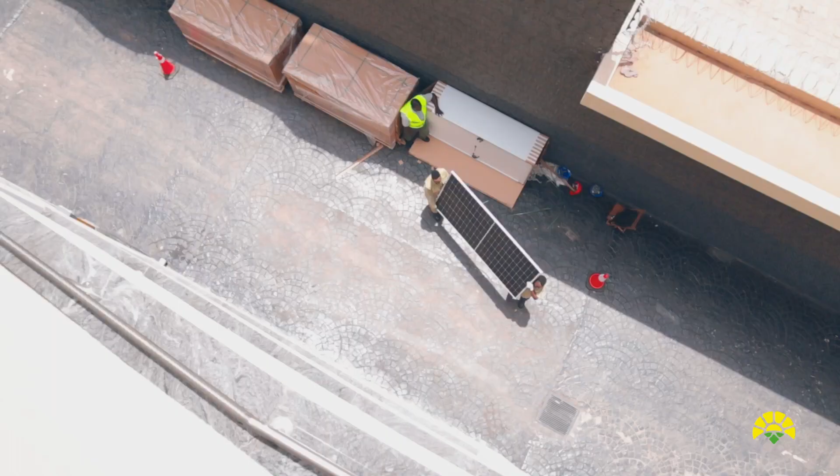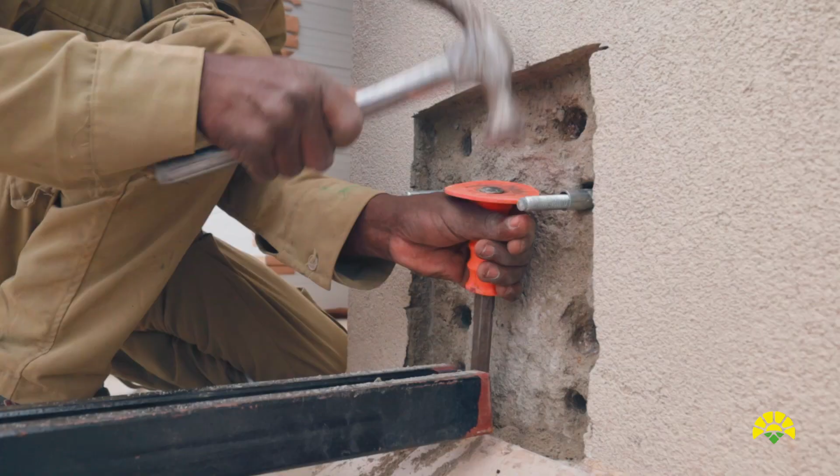In this video, you're going to see a lot of people doing a lot of things, cabling being one of them. We have to make our work look very clean. The weight of the cable is very heavy, 35mm cable. It needs a lot of teamwork.

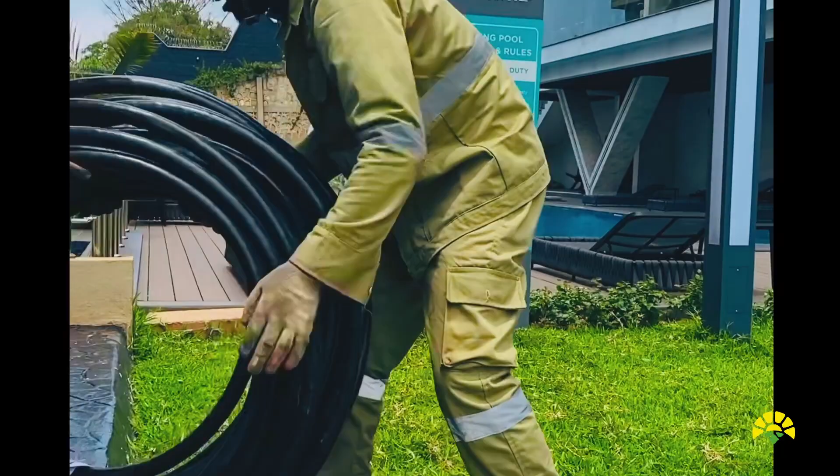Basically, we provide solutions for the commercial and industry market. With this, we're able to reduce, depending on the need of the client, energy bills and improve stability of power. We're able to provide all this.

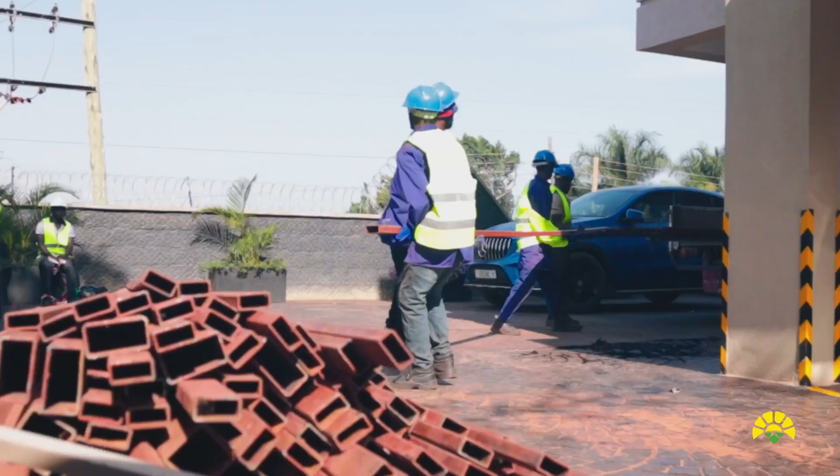This place here, the panels are supposed to go like this. These are vertical supports, 60 by 60. These are purlins, 80 by 40. We have 4 of these roofs we're covering in panels to really reduce the cost of their energy bills.

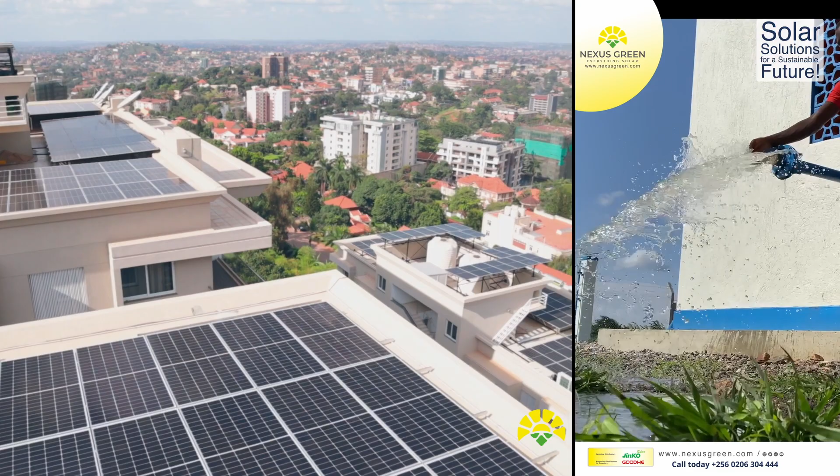We use tier 1 products, they're the best, and we want to give you the competitive pricing. So we are now the exclusive distributors for Jinko, which thank you Jinko for giving us that opportunity. This is going to be a game changer.

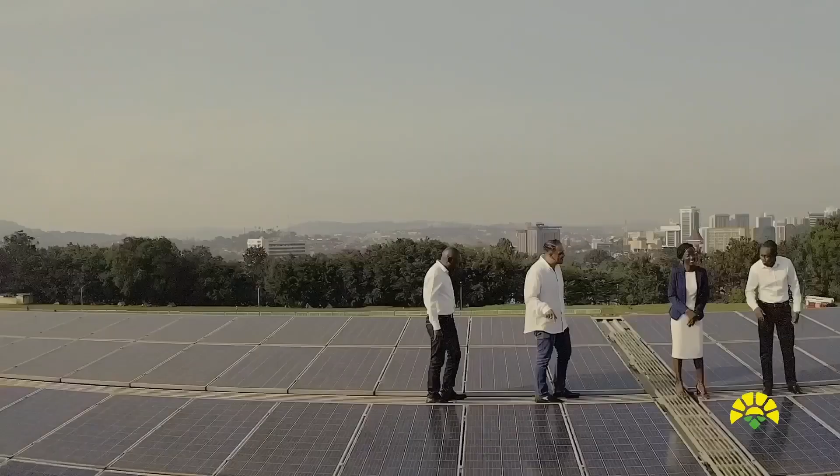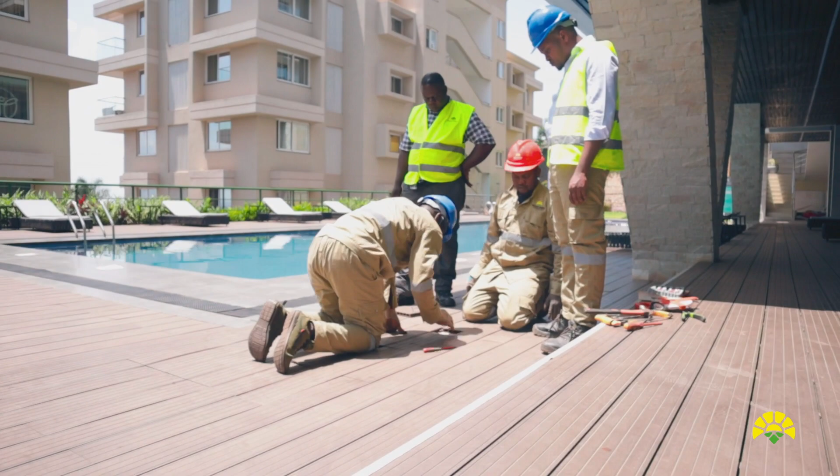Hello everyone, welcome to the Summit View Residence. Today, on the first day as Nexus Green, we are here to lay cables from one point of the inverter. We are using Fronius inverters. We shall have 2 inverters on this swimming pool, one at the other point, then the other at the other point of the building.

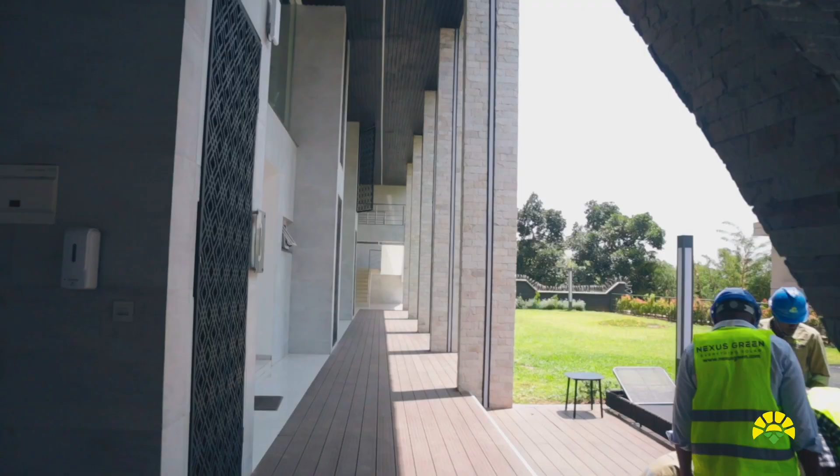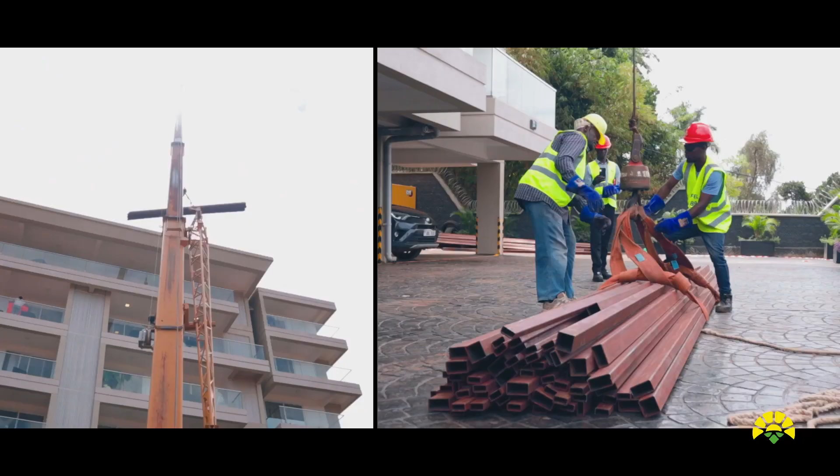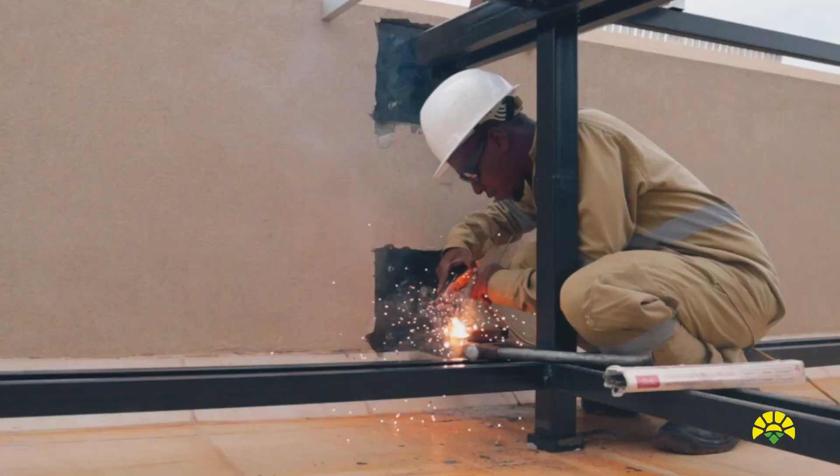We started by hoisting materials to site using a crane. The support structure has a simple dynamic - it attaches, holds anchors from wall to wall. We don't attach it to the floor. So we have 60 by 60 by 3mm hollow pipe as vertical members welded onto 50 by 25 by 3mm running beams. We also have rafters of 80 by 40 by 3mm where the panel sits.

After that, we anchor all the horizontal beams and the rafters onto the wall.

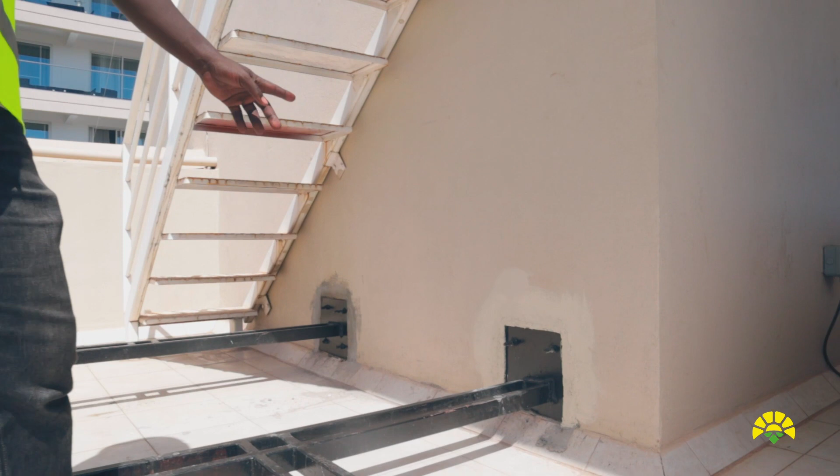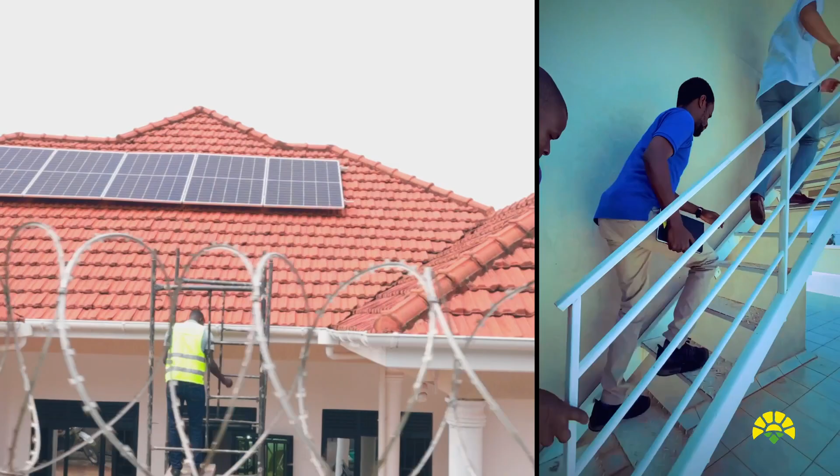Nexus Green is an EPCF company - engineering, procurement, construction, and finance. Basically, we provide solutions for the commercial and industry market. With this, we're able to reduce, depending on the need of the client, energy bills and improve stability of power. We're able to provide all this.

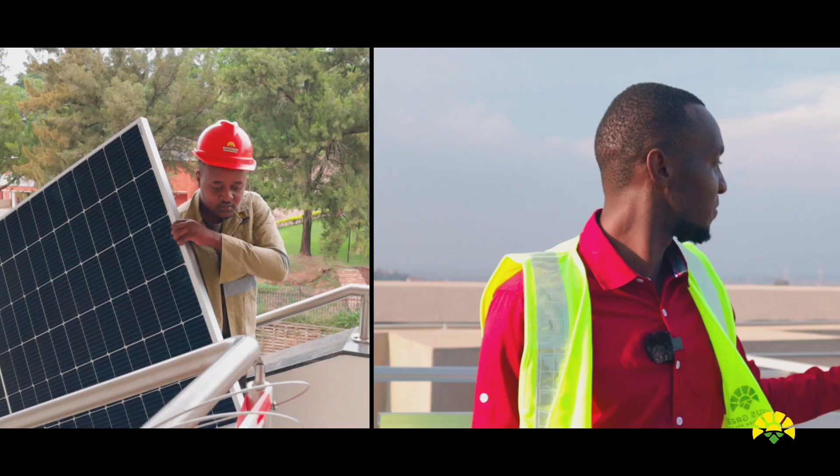At the moment, as you can see, we are trying to start on the panel layout. We've already done the base structure, and then on top of it, we shall have the solar mounting structure.

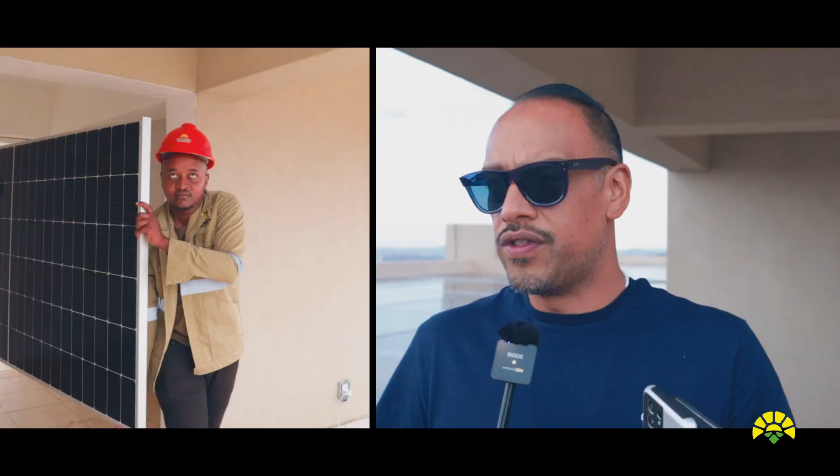What you're seeing today is one of our first residential solar solutions for this beautiful building called Summit Residence. We have basically covered every single roof with solar panels, so it will reduce all their bills during the day and on the shoulder, which we found out is 67% of their energy consumption. So this is going to be a great saver for the owners of this building.

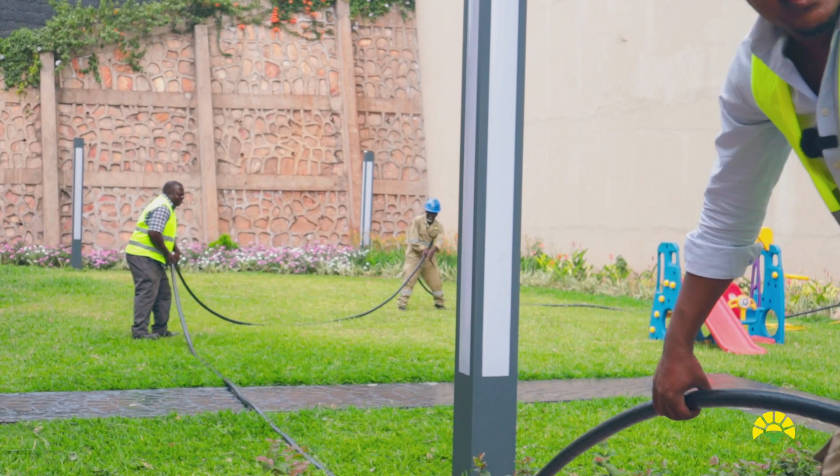We have to make our work look very clean. The weight of the cable is very heavy, 35mm cable. It needs a lot of teamwork - as you can see, it's a team of some heavy gentlemen.

Most people know Nexus Green for the Ministry of Water project we have, where we're blanketing the country with about 680 irrigation and water supply sites. As a company, we have a plethora of activities that we do. One of them is commercial and industry, where we provide solar energy use, productive use basically, for different environments. This job isn't a one-day thing.

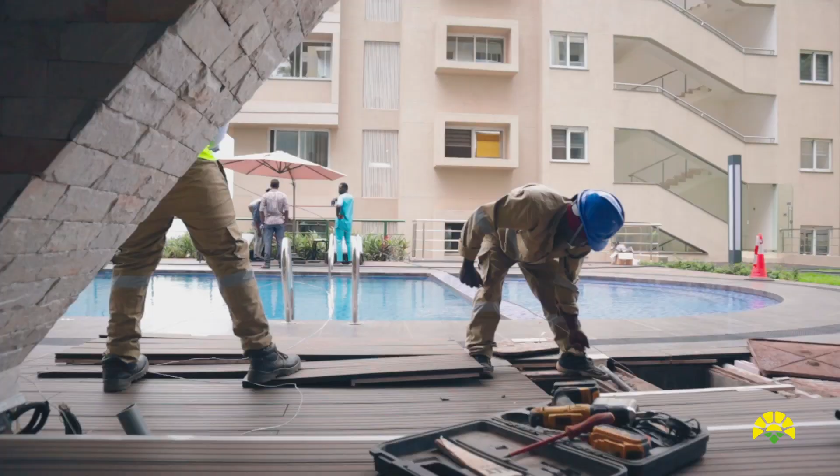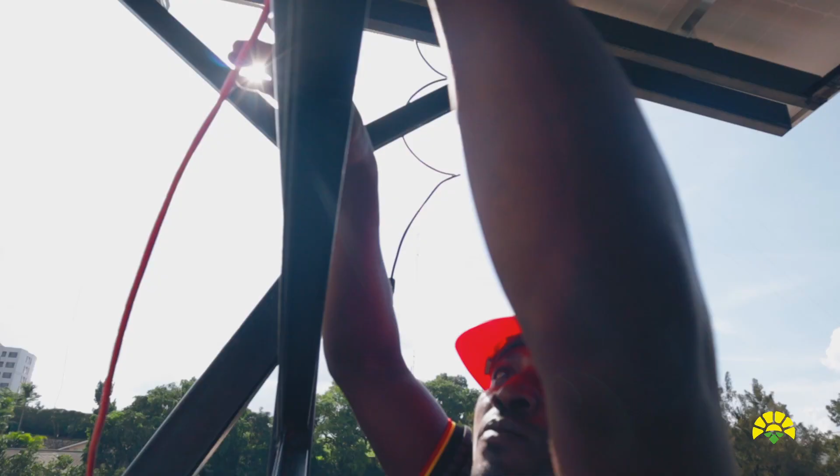It needs a lot of effort, needs a lot of energy. After we did an energy analysis of the site, we put in fluke machines to understand the energy usage, and come up with a detailed analysis of how power is consumed there. You realize most of their power is consumed during daytime. So with this, we're basically offloading most of that energy use at daytime and giving it to solar.

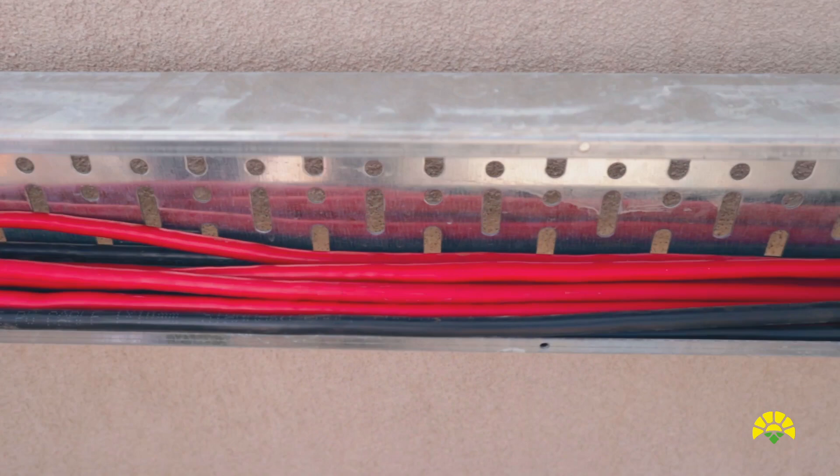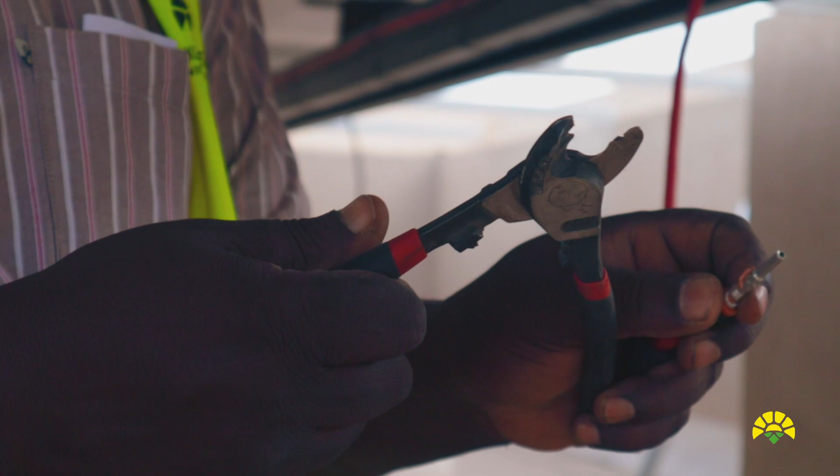We are at the equator, the best place to have solar, which is Uganda. So if you can offload that day load using solar, you've reduced their energy bills or energy consumption in a month by more than 36%. So with that, someone has more capital to invest in other things and allow solar. Remember, with solar, you're looking at a lifetime of more than 20 years of the panels. So for the next 20 years plus, they're enjoying amazing benefits from the solar.

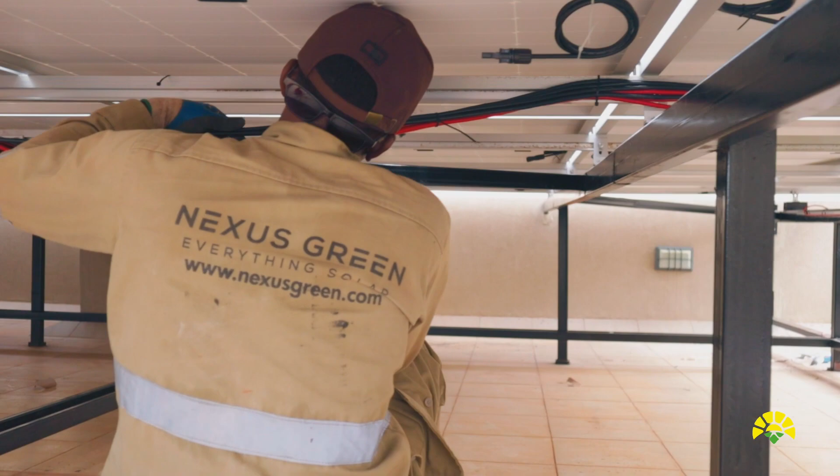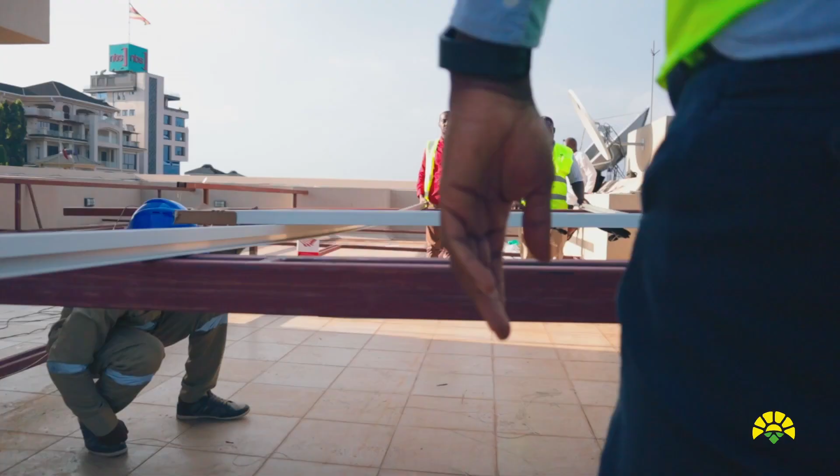Pull this rail lower, where it will clip on the panel, right? What do you want to do over here? All right, then get your book. You check, is it okay? Now put another one, put another panel. Now, do you want to add the third panel because we have it, or you think you can?

We add it, bring it. We had started by doing a structural analysis on this entire floor just to make sure that everything we are adding will pass a structural integrity test.

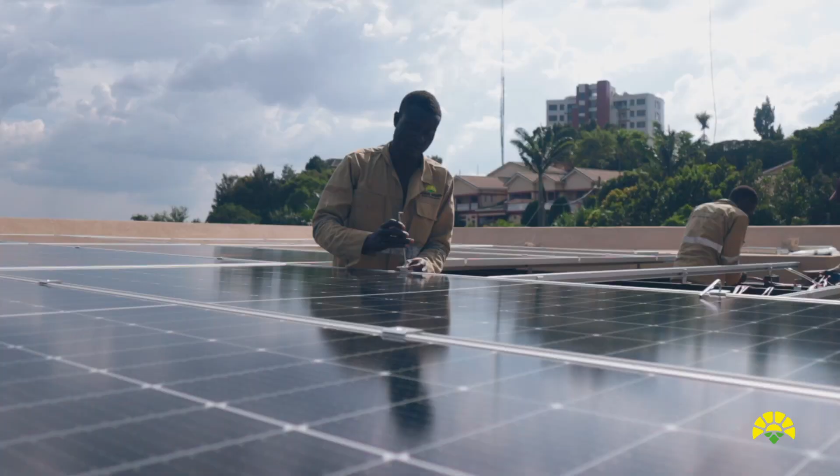We are guiding the team on how to correctly lay and screw the panels to make sure they are not blown off by the wind. So it's a very interesting phase. This is where we ensure that everything is done as per the book.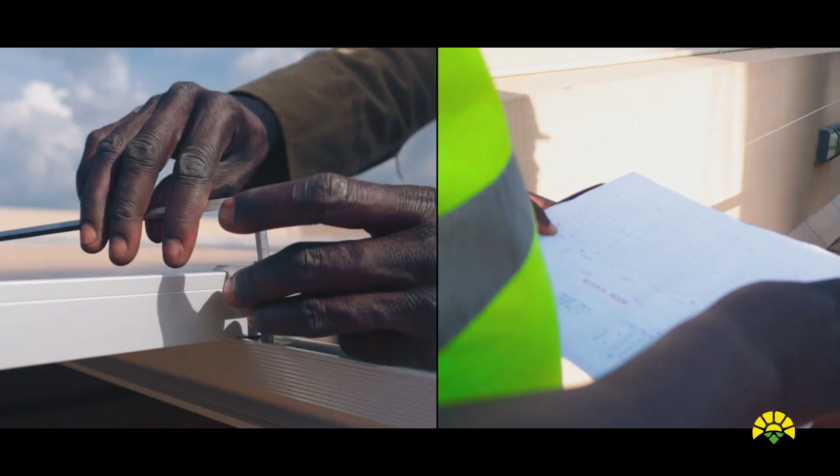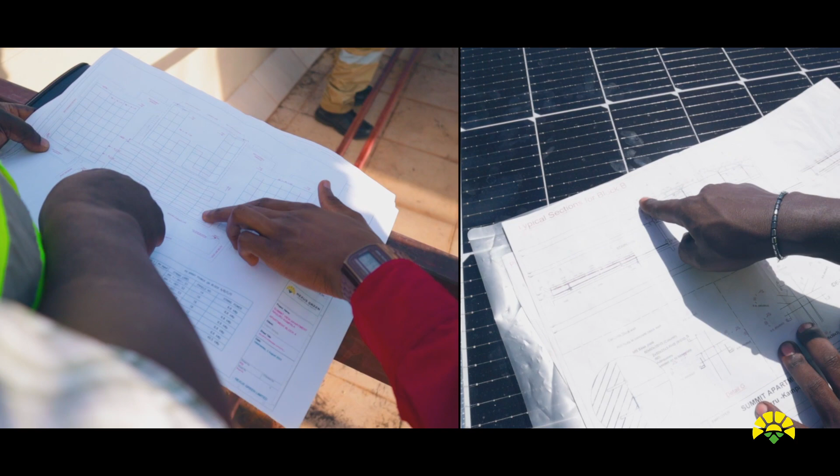This place here, the panels are supposed to go like this. This is the one. These are vertical supports, 60 by 60. These are purlins, 80 by 40. And these are cross beams of 50 by 25.

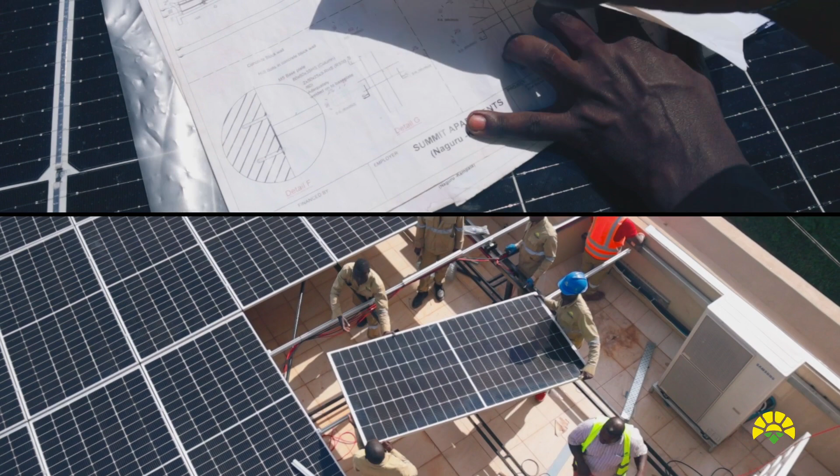So this detail F here is how to anchor the plate onto the walls to make sure our structure is very strong, has no wind uplift force that can work against it.

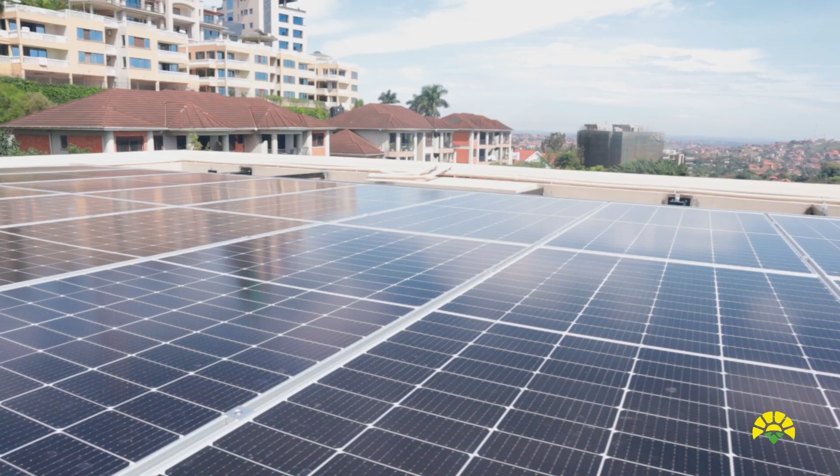These panels are Jinko panels, tier 1, phenomenal panels. They have a warranty for 25 years and above. These are 550 watt peak panels.

As you can see, the guys are still working hard. We're going to get this finished by tomorrow, and then we commission, so really excited. If you look up there, we've also got panels there.

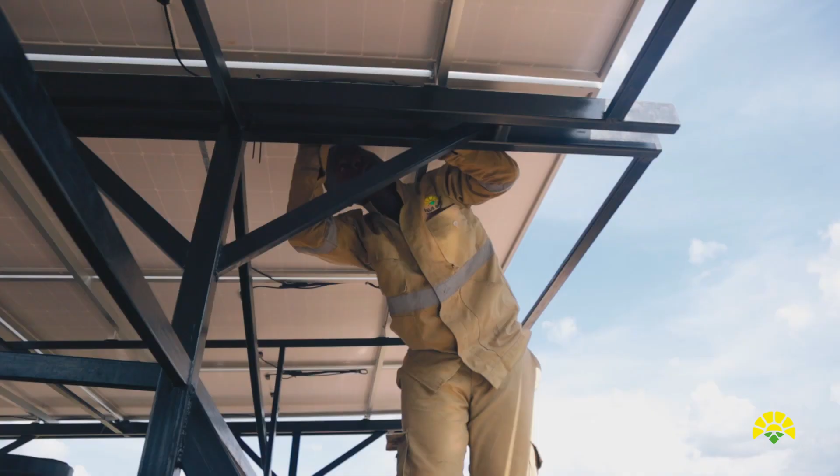This one here is a bit tricky because we are trying to protect the utilities, the water facilities, without changing the design.

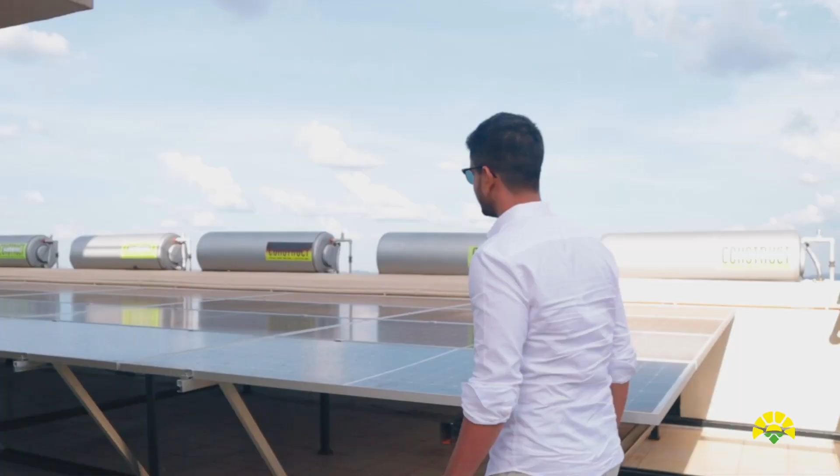Yes, it's been a very good experience working with Nexus Green. You know, the levels of professionalism and trying as hard as possible to keep to deadlines. As you can see, we are quite happy with how neat the final solution has come out.

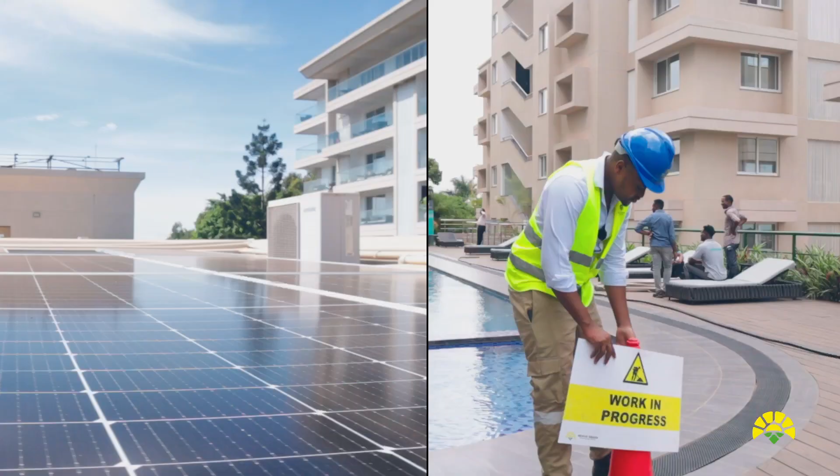As Nexus Green, we ensure that everyone is safe, having a helmet, a reflector, and a very nice trouser, well labeled Nexus Green with the safety shoes.

We've done 4 of these buildings exactly like this, covering the whole bottom part and the top part with solar, and essentially this is now going to be used during the day.

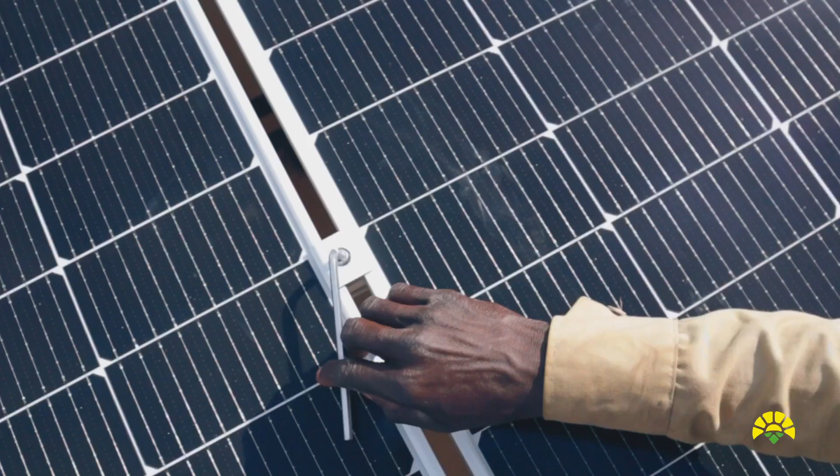This is one of our trophies here in Uganda. It's a game changer, and if we do this for this residence, we can do it for all these other apartment blocks that are coming up. Can you see those apartment blocks?

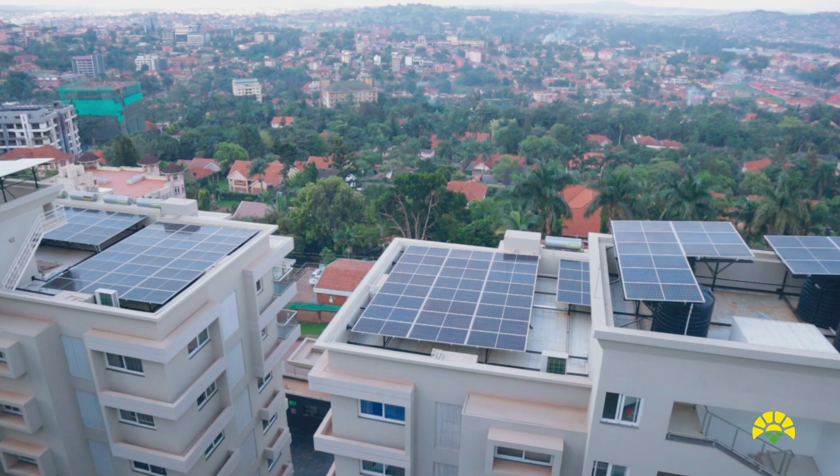We've got different buildings in the pipeline at the moment, ranging from commercial to residential, and also certain projects within the tourism sector. So yes, definitely Nexus Green can and hopefully will play a role in these buildings and projects, especially in terms of creating a fully sustainable property.

It's a selling point, especially within the ecotourism sector. We do see a potential future for growth.

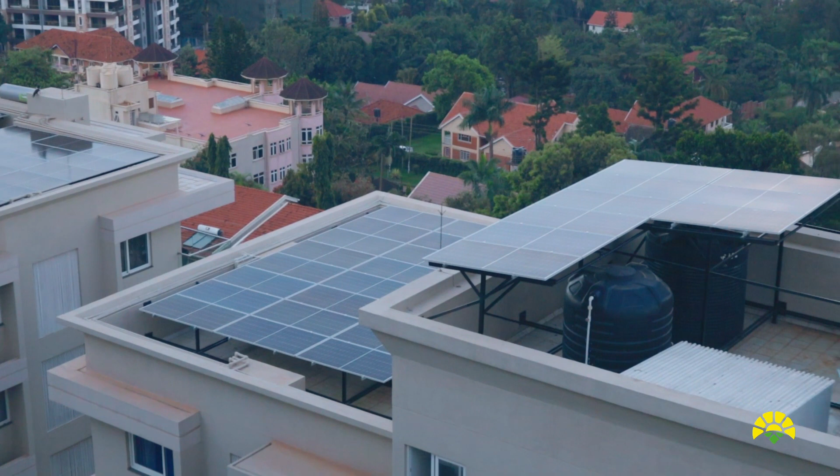When we look at our current Umeme bill, we do see that majority of our consumption is on the shoulder, which is the daytime consumption. So we're looking at anywhere between 50 to 70% savings on our month-on-month electricity bill, which is significant, and hopefully it will result in a payback anywhere between 5 to 6 years. So that's quite exciting, and after that it's pure profit in our account.

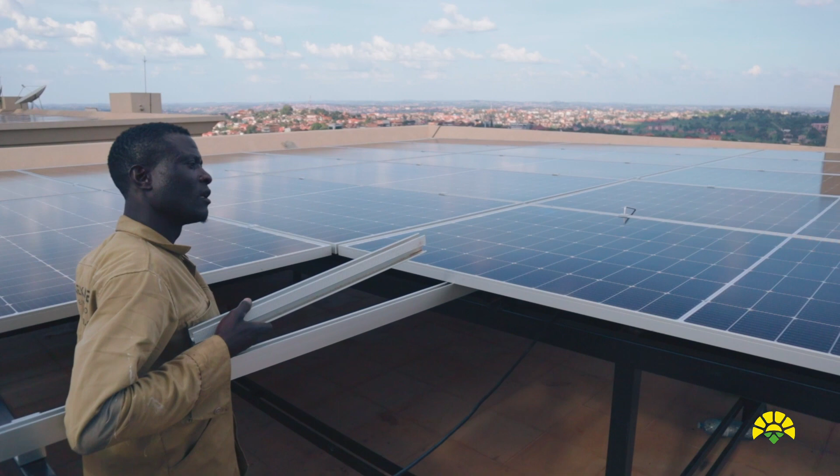So we're excited. So it's about making sure that you make the savings and get your responsibility as a company or this residential owner here to make sure that he's doing his part to reduce his CO2 footprint. So that's what we're about.

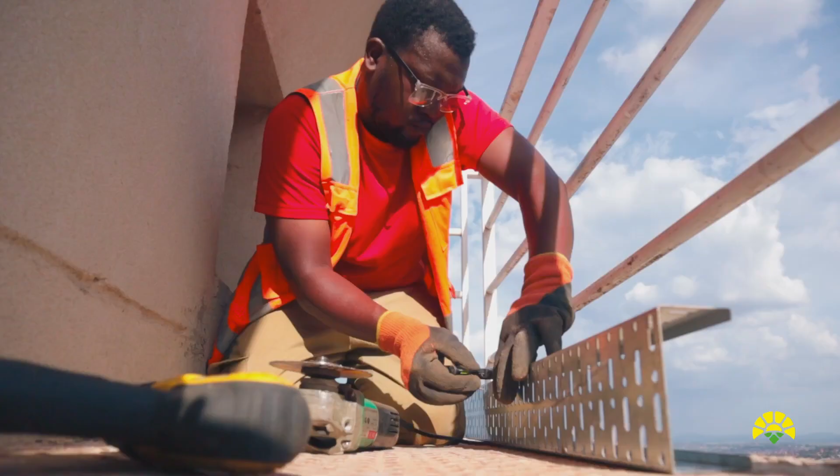So I'm really excited to keep doing these projects. We've got so many in the pipeline. We've got maybe another 6 projects that we've got to complete by the end of the year. And then next year is going to be, oh my gosh, a game changer. We've got so many things going on.